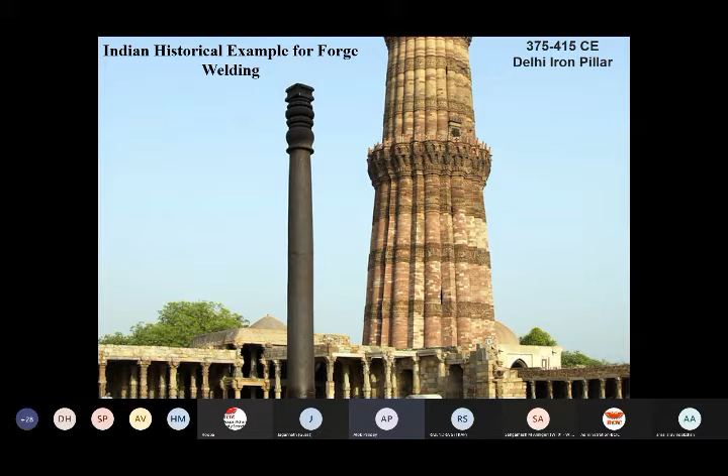Now basically when we talk about welding, welding is one part of joining technology. In the joining methods of welding, we have one which is fusion technology, where actually we are melting the base metal. So when we are working with base metal welding, that comes under the category of fusion technology. Fusion technology is popular in terms of arc welding, gas welding, and plasma welding - the normal popular weldings are arc welding in this particular robotic segment.

This is TIG, MIG, MAG, and CO2 welding, which is divided on the basis of gas and electrode. Second is pressure welding, where we are joining by pressure. This is an advanced version of forge welding, like the iron pillar kind of thing, where the complete component has to be forged and welded. But here, a particular point or area is forged at a particular temperature, and by applying pressure we are able to join the component. So this is an example with spot welding, friction welding, and gas pressure welding.

Then last is the brazing application, where actually we are not melting the base metal, and with that we join the component by the soldering and gas soldering method.

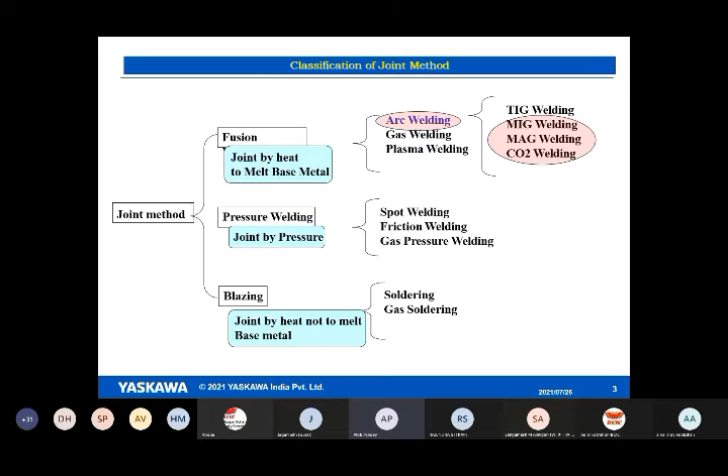When we talk about the basic principle of welding, welding is done with continuous current. We are just doing continuous current, and an arc is generated with the help of that. Whatever filler material and base metal is there gets melted, and we proceed with the welding.

In welding, mainly there are 4 things: wire feeder, torch, shielding gas, and power unit. The power unit normally requires us to give constant voltage and current. From the power unit, we give voltage and current for the wire feeder, so the wire goes through. Then the torch, which is normally positive in MIG welding, and we flow the material. And there's a shielding gas.

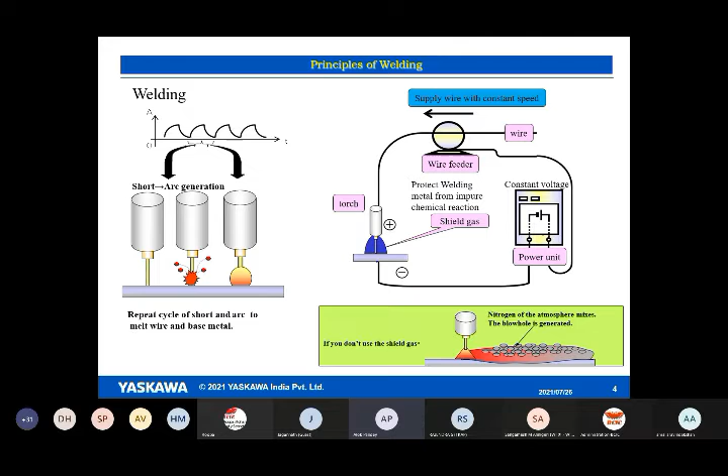Shielding gas is very important when we do any kind of MIG and MAG welding, because atmospheric contamination—nitrogen, oxygen, these kinds of gases—creates impurities during welding. The atmospheric nitrogen is the main root cause of generating blowholes when welding. So our shielding gas is very important, and that's why, based on the shielding gas, different kinds of welding are named.

Here we talk about the types of arc welding. As I told you, MIG, MAG and TIG are normally variants of arc welding. MAG and MIG welding work with a consumable electrode, melting our base metal. This is the most popular method, with 80 to 90% usage going to MIG and MAG welding, because now we normally go for high productivity, and wherever high productivity is concerned, we go with MIG and MAG welding.

The major advantage of MIG and MAG welding is high speed. The disadvantage is there will be some spatter and distortion, but with our advanced technology available at the current stage, we can remove the spatter completely, and distortion will also be controlled. So I would like to run a small video where a brief basic explanation is given about MIG welding.

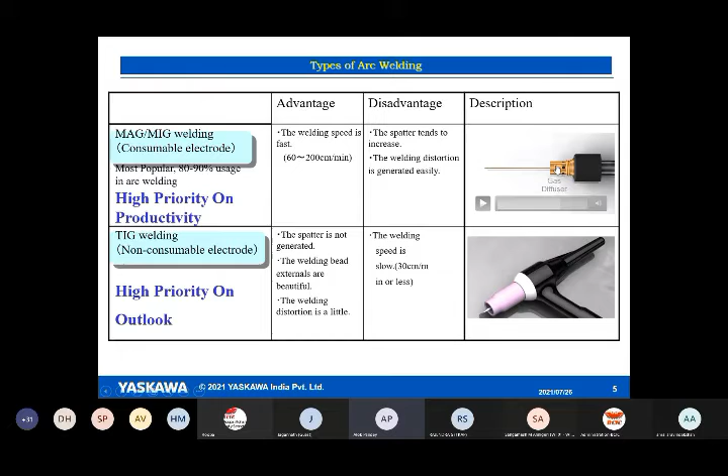Whatever shielding gas is there goes through this particular unit called the gas diffuser, and the gas diffuser works to diffuse the gas. So our welding gets protected from blowholes and other such issues.

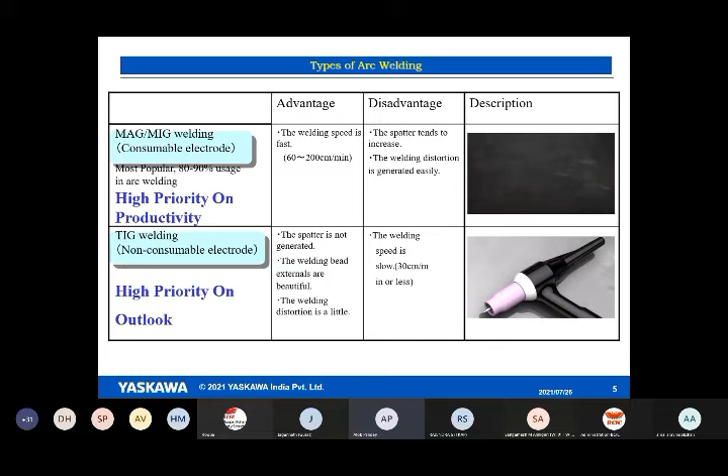Now we'll talk about TIG welding. TIG welding uses a non-consumable electrode, and we normally use TIG welding where we require a good outlook. The advantage of TIG welding is that spatter is not generated, the welding bead looks very beautiful, and distortion is very little. But of course, TIG welding works at a very slow speed.

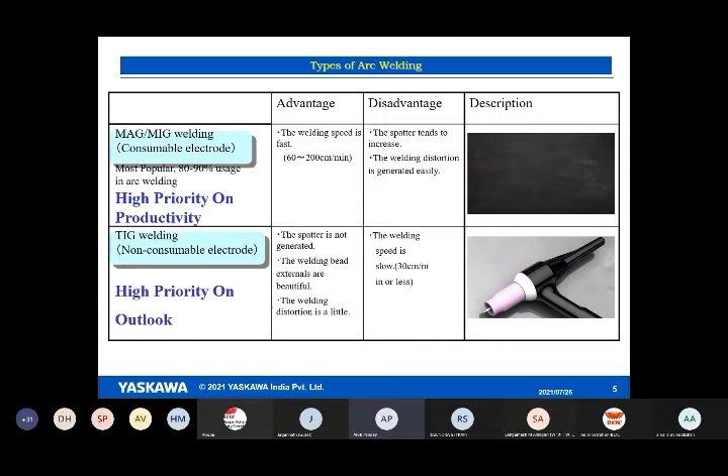When we talk about the welding technology here, we have a tungsten electrode, and tungsten has a very high melting point. So in this case, since tungsten has a very high melting point, it is normally considered a non-consumable electrode.

It means it's not really non-consumable—it also gets consumed, but it takes a very long time, because here only the base metal is getting melted. With the help of this electrode, we are able to melt the base metal and succeed in TIG welding. In MIG welding, whatever electrode is there gets melted, but in tungsten welding, it does not.

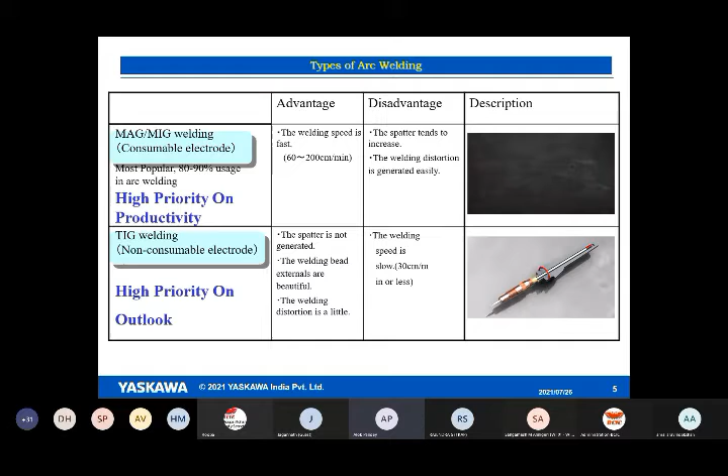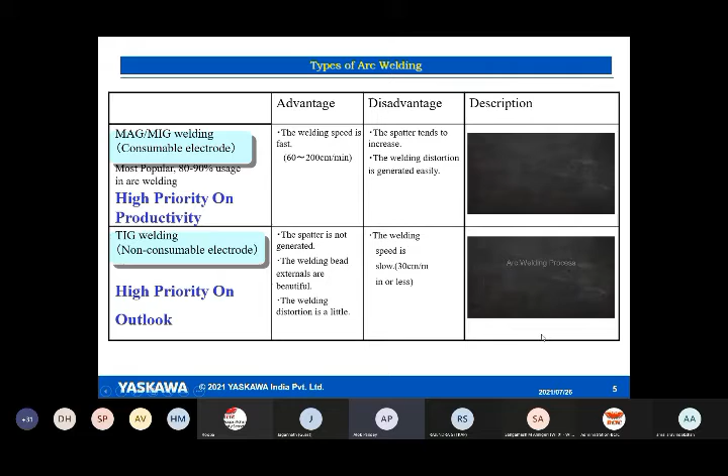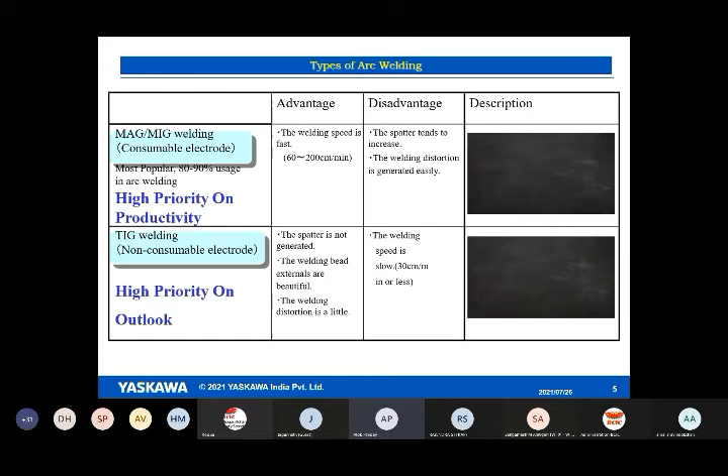So that we can adjust the electrode whenever we are doing the TIG welding, and it will be covered by the end cap. So this is TIG technology where, when we are feeding, it's just melting the base metal, and by melting the base metal we are able to weld the component. This is an arc welding process with a non-consumable electrode, filler metal added by hand or separately. Shielding gas is stored in the cylinder at high pressure. So this is a summary of MIG and MAG welding along with TIG welding.

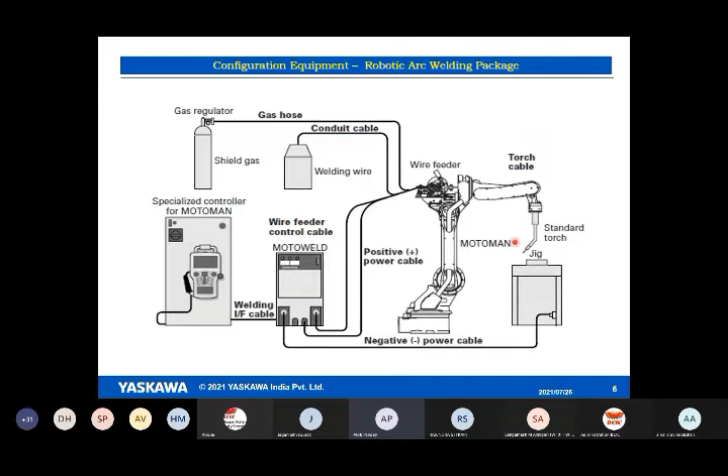And the gas hose goes from the gas cylinder. As we have already seen in the video, there are gas regulators from where we control the gas pressure. From the gas hose it goes to the wire feeder, and through the wire feeder it moves towards the torch, and comes out from the gas diffuser. So this is the basic combination for robotic welding, and this is a complete setup, a ready to weld package. So whenever you are discussing with any vendor, you have to take the complete package for normal robotic welding.

Then we talk about the classification of MIG and MAG welding. One is on the basis of waveform control: a pulse waveform and a short arc waveform. Second is on the basis of gas. The shielding gas, as I told, plays the major role. Argon gas is normally used in aluminum MIG welding. Argon 98% with O2 is mainly for SS welding, and MAG welding with argon and CO2 mix is popular for mild steel and SS. CO2 welding, which has the lowest gas price, is normally used for mild steel.

So normally, as this chart shows, the price is low when we go for CO2 welding, but spatter tends to increase. But we have a few latest technologies with which we can even control the spatter with CO2 welding, and we can go with high speed also, which I will explain in a later slide on the Eagle method.

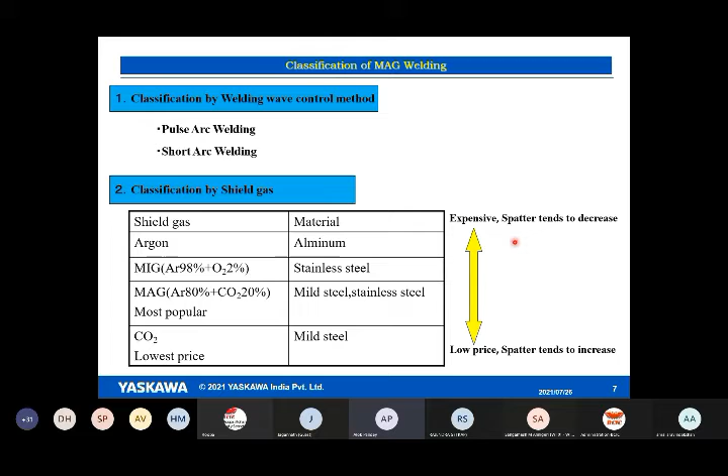So now, gas type welding. In gas type welding, as already explained, there is MIG, CO2 and MAG welding. Now I just want to touch on the good points of each gas. CO2 gas gives very good penetration because of a good amount of heat input. But of course, some spatter is generated. Then with argon gas, arc stability is excellent, and as a result the mechanical properties will be excellent.

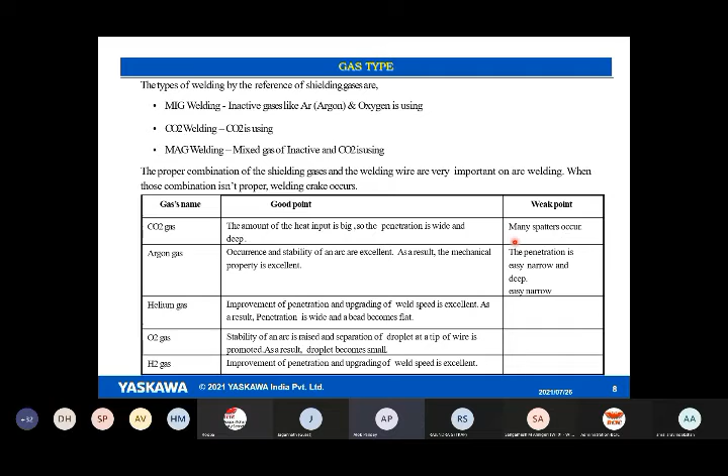With helium gas, the improvement of penetration and upgrading of weld speed is excellent. With oxygen gas, arc stability rises and separation of the droplet at the tip of the wire is promoted. As a result, the droplet becomes very small. And with H2 gas, improvement of penetration and upgrading of weld speed is excellent. As for weak points, with argon gas the penetration is shallow and narrow, so penetration will be less with argon gas.

Now we'll talk about the waveform basis. On a waveform basis, there is pulse welding and short circuit welding. I am just talking about this on a thumb rule basis. Pulse welding we normally use for more than 3 mm. Of course, pulse welding can be used with higher trends of technology with 1 mm also, but on a welding thumb rule basis, normally we use pulse welding for medium thickness.

The pulse welding advantage is that its speed is normally 80 centimeters to 200 centimeters, so we can go very fast, and the amount of spatter tends to decrease. As a disadvantage, burn through tends to be generated, and welding distortion tends to be generated.

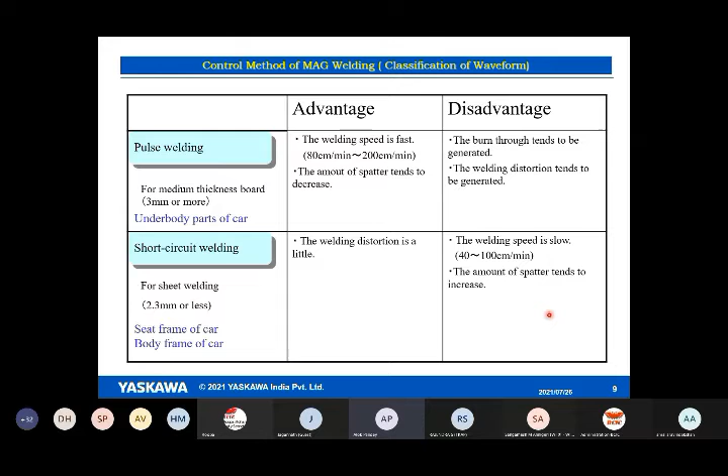Short circuit welding, as a thumb rule, is known for lesser sheet thickness, like 2.3 or below, and the welding distortion is very little. The welding speed is slower than pulse, and spatter tends to increase. But as I already told, the slow welding speed and increased spatter is an issue with short circuit welding, but when we go with advanced technology, this will not become an issue in short circuit welding.

So this is the waveform format. I just want to explain how the waveform normally works in pulse welding. In pulse welding, wherever we are holding the current, in this particular area we are melting the wire. This is the production of the droplet. Then after that we are transferring the metal droplet, and at the end we are again holding the current and maintaining the arc, and we repeat this cycle again and again for pulse welding.

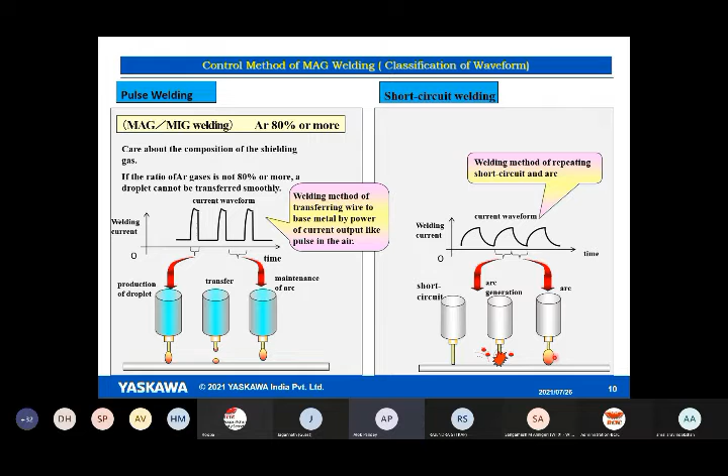In short circuit welding, our wire is touching the base metal, generating the short. When the short is generated, arc generation will happen, and with this continuous cycle we are maintaining the arc and continuously doing the welding.

This selection of welding is a summary of whatever we have talked about short circuit welding and pulse welding. Short circuit welding is basically for the base part category: seat frame, body and frame. The sheet metal thickness is 2.3 or less, and pulse is 3 or more. Welding speed is 40 to 100 centimeters, and pulse is 80 to 150 centimeters.

Penetration in short circuit will be high, in pulse relatively low. Bead appearance in short circuit will be higher spatter, less burn through, and in pulse, low spatter, more burn through.

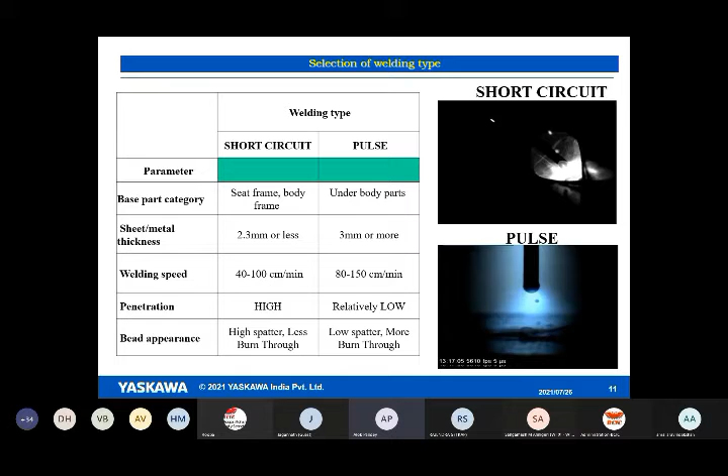These examples are there. On the right hand side, both videos are shown. In short circuit welding, the wire is continuously feeding, touching the base metal, generating the short again and again and melting the wire. On that basis, welding is going on. And in our pulse welding, when we are holding the current, we are melting the wire and the droplet is going down, and with this continuously we are melting the wire and performing the pulse welding.

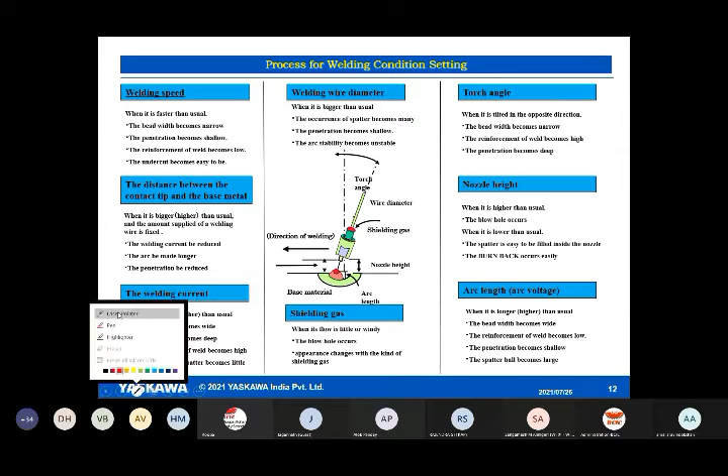When the distance between the contact tip and the base metal is higher, which we normally call stick out, the welding current is reduced, the arc will be made longer, and penetration will be reduced.

When the welding current is bigger than usual, meaning more than the welding current you have to provide, the bead width will become wide, penetration will become deep, reinforcement of the weld becomes high, and the occurrence of spatter becomes little.

Then of course, in welding we have different wire diameters. Whenever we increase the wire diameter, spatter occurs more, the penetration becomes shallow, and the arc becomes unstable. The next is the shielding gas. Whenever your shielding gas is low or it is windy, you tend to get blowholes in your welding bead. The appearance changes with the kind of shielding gas we are using.

Then torch angle. If we go in the opposite direction from the predefined torch angle, the bead width will automatically become narrow, the reinforcement of the weld becomes high, and the penetration becomes deep. When we talk about the nozzle height, as shown in this diagram, the tip and wire stick-out together is the nozzle height.

Whenever we increase the nozzle height, blowholes occur, and when it is lower than the usual height, spatter easily gets filled inside the nozzle and burn back in the nozzle will happen. So we have to be specific about our nozzle height. Then arc length and arc voltage. When it is longer than usual, the bead width becomes wide, the reinforcement of the weld becomes low, and penetration becomes shallow. But the spatter ball becomes very large whenever we go with a longer arc voltage.

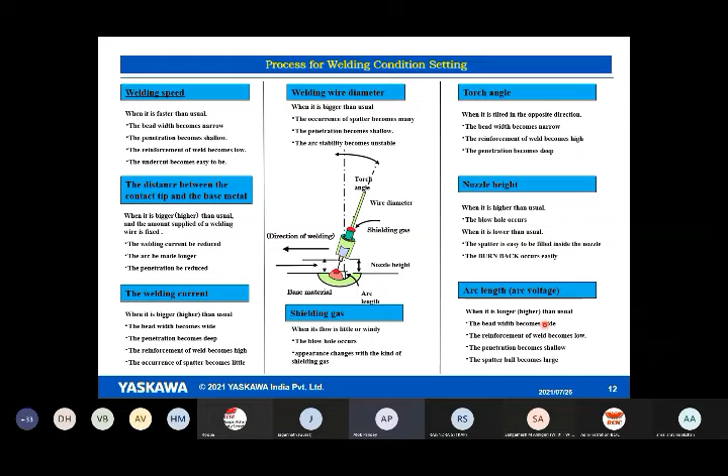So this is a summary of the weld conditions. This is of course the basis of a basic thumb rule only; with different technology, things always change. Other than this, I want to talk about a few pre-process examples. When we are doing heavy welding, some kind of crack occurs. So how can we reduce that crack?

For reducing that crack, we have to go for the pre-process, and that pre-process is preheating of the base material. Preheating the base material to be welded minimizes the temperature difference between the material and the arc, slows the cooling rate in the weld area, and reduces the risk of cracking.

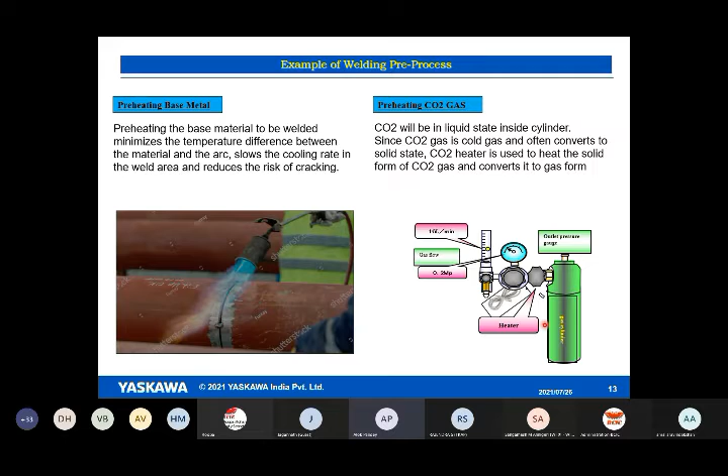Also, preheating of gas is required whenever we use CO2 gas. CO2 gas has a tendency, when the temperature is very low, to get into a somewhat liquid or solidified stage. So in that case we have to use a heater. If we heat the gas, then when we are welding, our weld width comes out proper. So in case of CO2 welding, we have to use the heater on the backside for good welding.

Other than welding and the welding power source, let's talk about robots, because these power sources have to be mounted on the robot. In the industrial category, robot suppliers have different reaches and payloads based on customer requirements. A 700 mm or 900 mm reach robot is very compact, specific to applications where the customer is very choosy about space consumption. If you want to work in minimum space, then normally we go with a smaller reach robot.

But in automotive, the popular range of robots is the 1440 mm reach and 2 meter reach robot. These two robots are very popular in the automotive industry, and with them we can solve all kinds of components. Then there is one more, a 7 axis robot, where the elbow arm has one more axis. If you are making a very compact cell and want extra accessibility through the robot, normally we go with this 7 axis robot.

When a 3 meter reach robot is required, this is normally for the engineering or non-automotive industry, where your reach is very wide and you require a longer reach robot. Production is not that much, so in that case we go with a longer reach robot, where a single robot, single machine can perform the work and you can achieve the complete component.

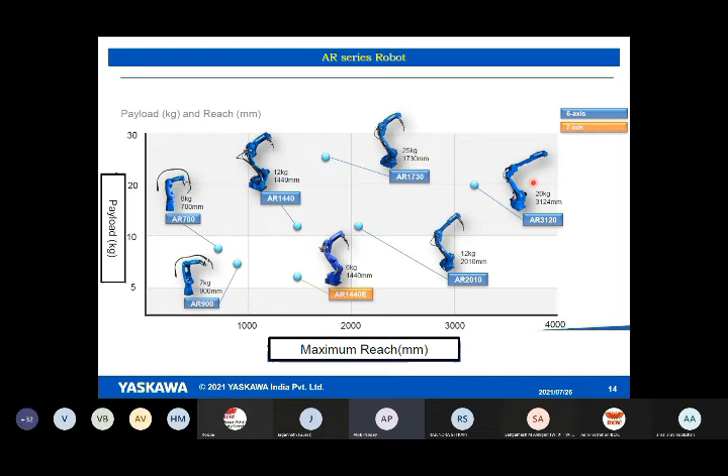Then this different kind of power source. So on the basis of function and on the basis of thickness we have to choose the power source. When we talk about the 350 amps category power source, as a thumb rule they are normally suitable from 0.6 mm to 4 mm thickness of welding, where their performance is very good.

And when we talk about the function, like basic short circuit welding power source like SR350 and all that we have. So with the basic function we can move further on that. And when the function needs to be increased, like low spatter with CO2 welding and pulse welding, in that particular case this X350 power source is there. So whenever we are enhancing the pulse technology, going for low spatter, we are increasing the function.

And further, with 100% CO2, as I told in the earlier slide, CO2 has a tendency to generate more spatter and speed is slow. But when we go with this kind of system like Eagle, this is a servo wire feeding system where the torch is servo. From the actual servo motor you are taking the wire, pushing it, and controlling it by a push-pull mechanism. This will reduce your spatter by 97% and increase your speed by 40 to 50%. So this is an example where from short circuit welding also you can get very good speed and very good bead quality.

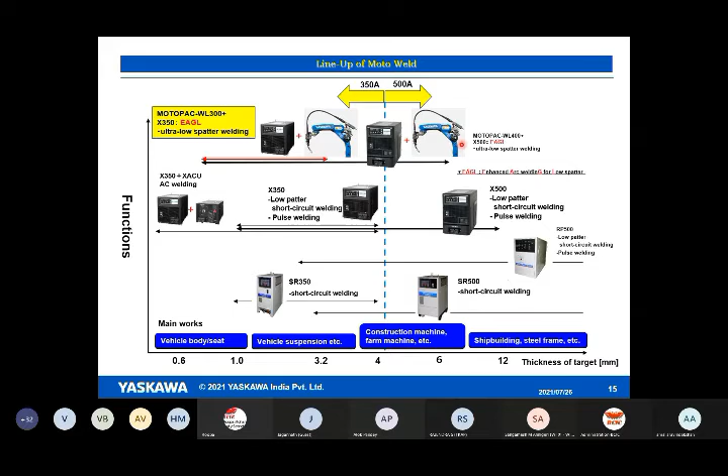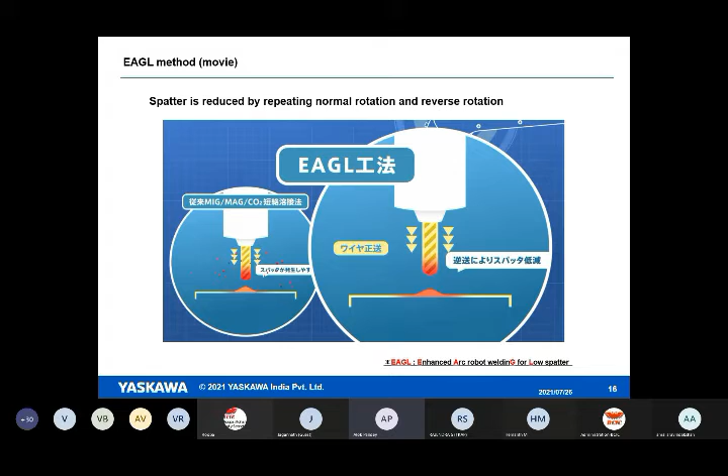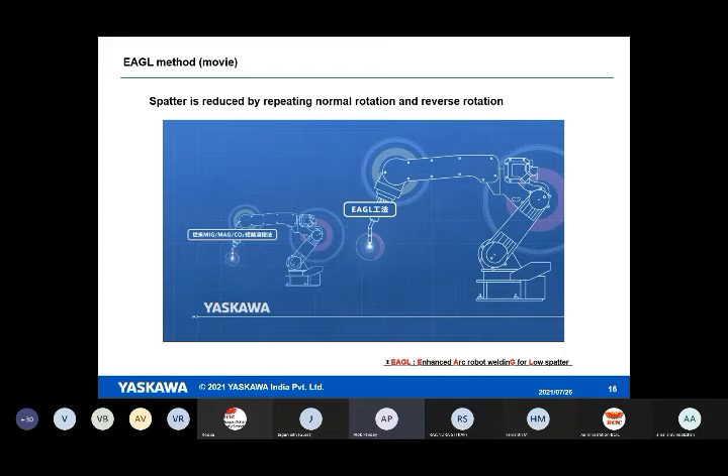So here I just want to explain how with Eagle welding, or with a servo wire feeding system, we can achieve low spatter with short circuit welding only. If you see in this video, when normal arc welding is happening in short circuit, the wire is moving continuously in the forward direction, and when it touches the base metal, the back force is generated and spatter generation happens. But with the push and pull system, we are continuously feeding the wire and then going back whenever the back force comes. So spatter generation will be very little. And second, as it has a servo wire feeder, we can push the wire at a higher speed and achieve greater speed from the same welding machine.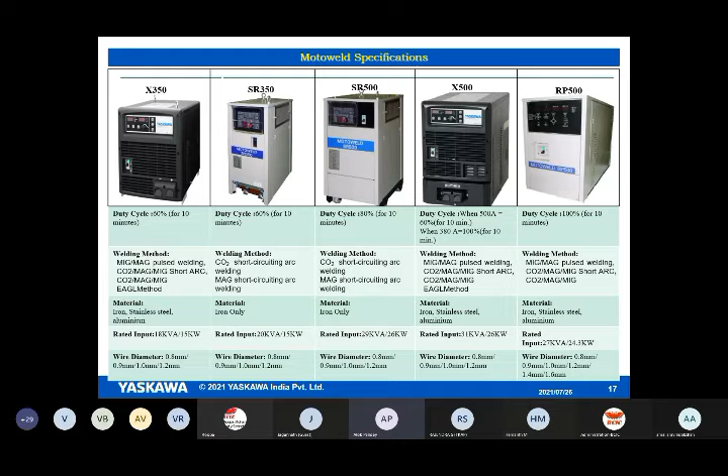So these are different kinds of power sources, we have X350, SR350, and this is catalog data. So I don't want to go further with this data. I will skip this slide.

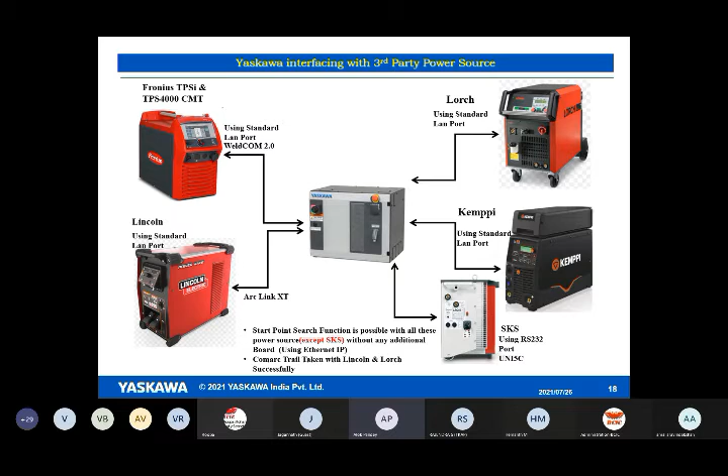Other than this, the robot suppliers have their own inbuilt power source. So normally we suggest that wherever the customer is a first time user, they should go with a pre-built single source solution, robot and power source. But on the basis of technology demand, if the customer is going for very thin sheet welding, then TPS 4000 CMT, a CMT power source, is required. In that case you can use Fronius, and Lorch, Lincoln and Kemppi also have special technology for special dedicated components. So you can use all these kinds of power sources, select them with our robot, and weld the component as per your requirement.

Then when we talk about the robot power source, if we see in the market, as Jagannathan sir told, there is still a possibility that we are not getting the actual component, because our pre-process, our cutting process, or our stamping process is not correct. Because of that some deformations are there, so we are not getting the actual part position.

So in this case, we have different kinds of technologies available in the market for seam finding and seam tracking. By calculating only the first and last point of your component, you can find the bead and weld. In that case you will be going for seam finding. You search the first point and last point, make the program, and it will be welded automatically. For seam finding, different techniques are there, like touch sensing, AccuFast, MotoSight 2D, and Servo-Robot SF-D/H.

When we talk about touch sensing, it is actually through wire sensing. With the filler wire we go and touch the component on both sides, and after touching the component we find out what the center of that component is, and then we start welding.

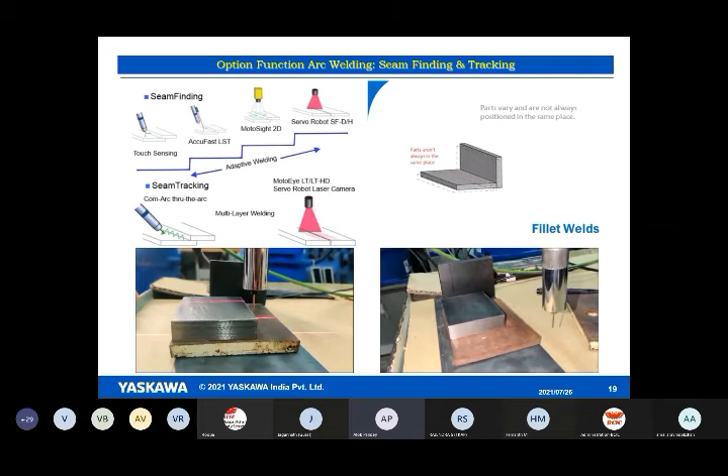With laser cameras and laser sensors, two examples are shown below, where in all three directions, X, Y and Z, we can find the part deviations and weld through the arc. In the first video, we have tilted the component, and even after tilting it, when the torch starts welding, it follows the component.

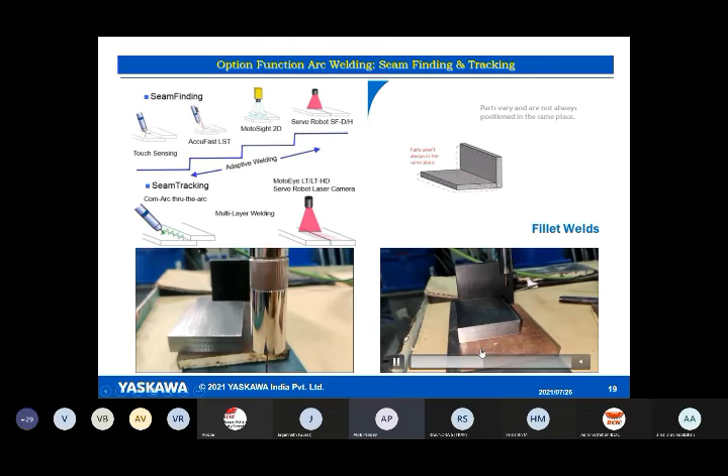In the second video, the component is placed on one level, and now we are increasing the height. After increasing the height, when the robot starts, it follows the path, changing the height. So with the laser sensor the searching time is very short, and with that short searching time we can find the part and bead and weld the component through arc welding.

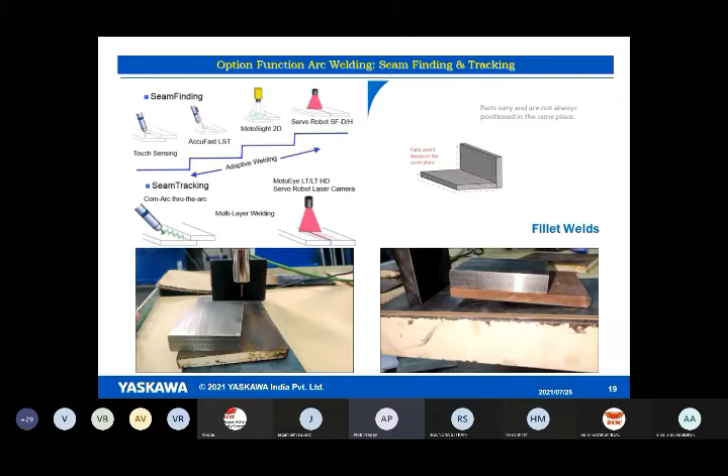Now we'll talk about robotic jigs and fixtures. A complete robotic welding cell consists of the robot, welding power source, safety enclosures and welding fixture. The welding fixture also plays an important role in robotic welding. Whenever we are welding, we have to make sure the torch is accessible at all points with the predefined angle required for welding, and proper clamping should be there.

In this picture, what we want to show is that we have given clear space, because here we are using the laser sensing method. First the robot searches and then it welds, so it requires clear space as well.

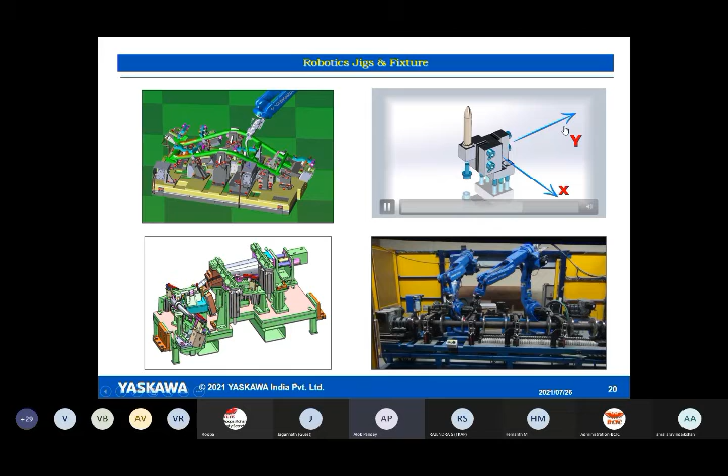This is an example of a locating pin. This is a mounting, and here we have a block. In X and Y direction, we should have variation and adaptability to change the fixture. So this is an adjustable 5mm shim and 5mm block. Here also 5mm shim and 5mm block as a rule of thumb we have to see, and this kind of X and Y tolerance we have to keep for modification.

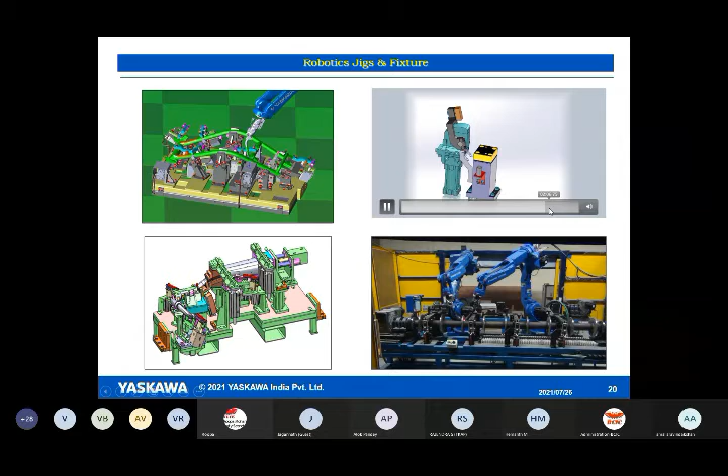Also, when we talk about the support tower with tower clamp, in this particular case also we have to place it in Z direction. In Z direction, 5mm plate and 5mm shim should be there, so we can adjust in Z direction.

Also in robotic welding, we should always have a part presence sensor, because if the operator has not loaded the part, that has to be taken care of.

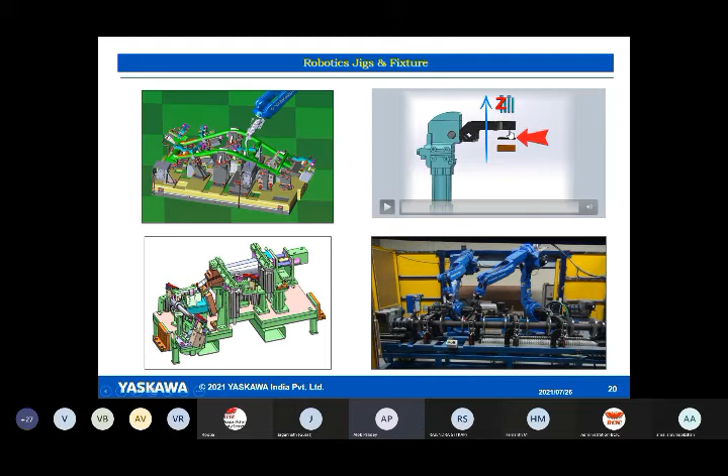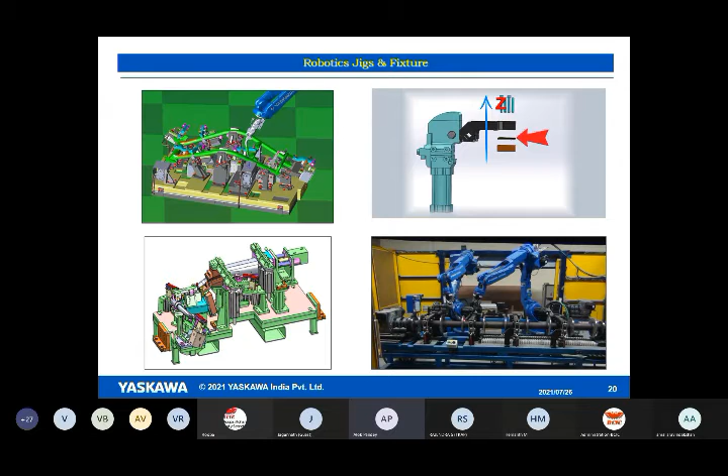And this is just one application video which I would like to run through.

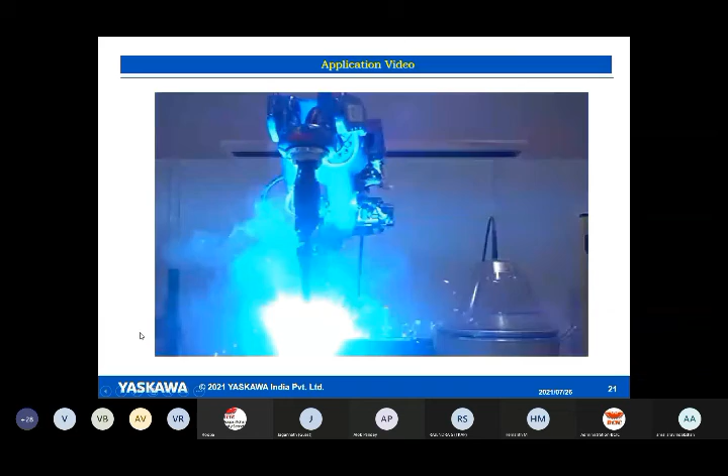If you listen to the sound, normally whenever we are doing welding, the sound actually gives a perfect feel for what kind of welding you are doing. If your sound is good, then your welding is also good.

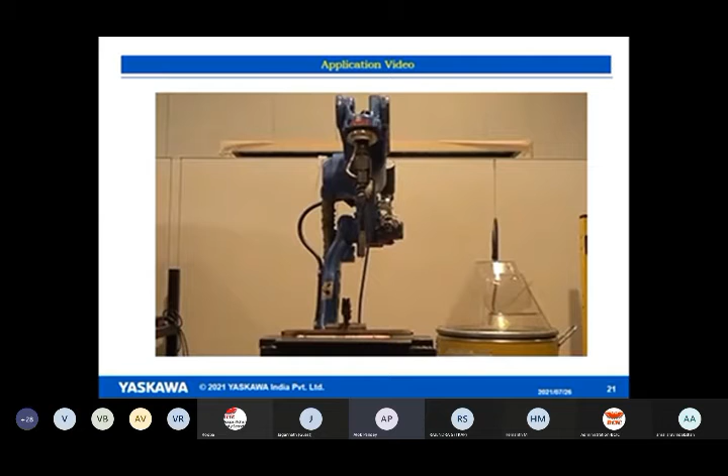As Jagannathan sir told, we will move further for the ROI calculation. Whenever we go for ROI calculation, before that we have to make the estimation sheet, like how many parts we can produce. And when deciding how many parts we can produce, there are basic parameters for that.

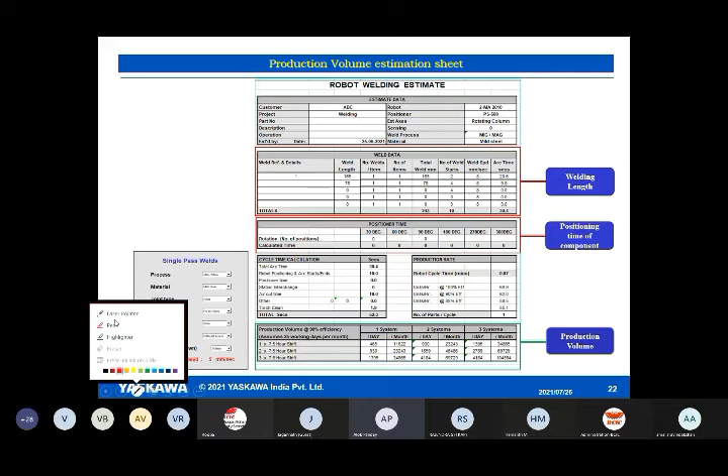The basic parameters we have to select: whether it's single pass welding or multi pass welding, which process we are using - MIG, MAG, TIG - what kind of material, what kind of joint, what position - horizontal, vertical - what is the bead size, and what is the speed factor, meaning whether it's difficult to access or easy to access, linear welding.

When we enter all these details, only after that can we understand what the welding speed will be. So on the basis of filling in this detail, we can understand the welding speed. This data is required for calculating the basic welding speed with wire size.

Once we get the welding speed, then we select whether we are using a robot. And if we are using a robot, after that, if we are using any positioner, whenever you are tilting the component, that also takes some cycle time. So the positioning time has to be calculated whenever you are going for positioning the things, or any external axis by rotating column and such, that is going to increase cycle time.

Or the sensing technique - whenever you are using any kind of sensing technique, it's going to impact your welding time. Whatever your welding process time or welding cycle time is, welding speed is there, that is going to differ, normally for through-arc welding.

So all these things we have to enter and put the data, and after that only, each bead or length we have to enter, number of items we have to calculate - how many number of items. On the basis of number of items and such, we can calculate how many number of starts and stops are there, because each welding, whenever arc start and arc stop is happening, depending upon the power source, it takes 0.4 to 0.7 second for arc start and arc stop. So how many arc starts and stops there are, that has to be added.

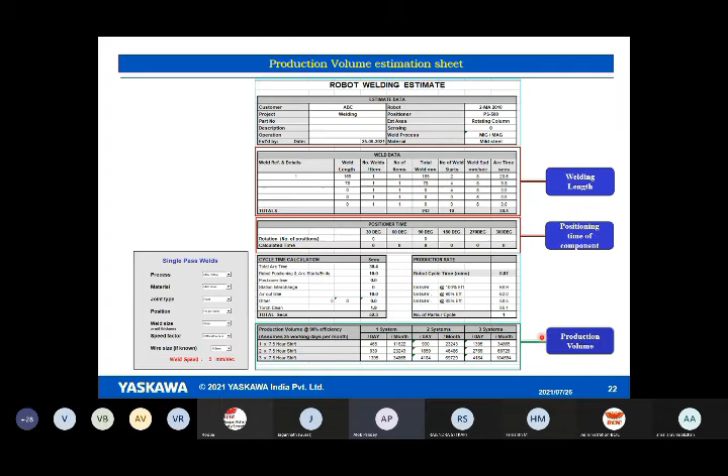And when we talk about the ROI sheet, different people, different customers, and different kinds of vendors tend to have different kinds of approaches.

But when we talk about one component, I have taken the example of fork and frame with a thumb rule, where we are using only one robot for welding 3.2 meters. This is a very rough example. So if 3.2 meters complete length is there with this wire weight, and the approximate rate I have taken is like 90 rupees per kg, something like this.

In this particular case, when we are going with manual welding, calculating weld cost, gas cost, power cost and labor cost, including all that, it comes approximately 56.48 rupees, or around 56 rupees cost for 3.2 meter welding.

When we talk about robotic welding, approximately 10% saving will be there for the welding wire. How does this wire saving happen? One thing is, whenever a manual labor is welding, he tends to make a bigger bead, so that's one saving.

Second saving is that whenever we go for robotic welding with the same parameters, we have good spatter control. And whenever spatter generation happens, spatter is actually a loss of wire. Less spatter means you are utilizing more wire efficiently; more spatter means you are wasting more wire. So the wire consumption with spatter, and whatever excess material we are not feeding, we are covering that.

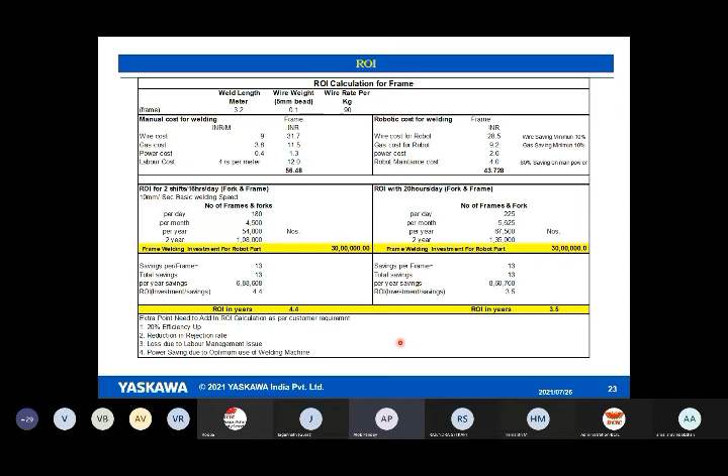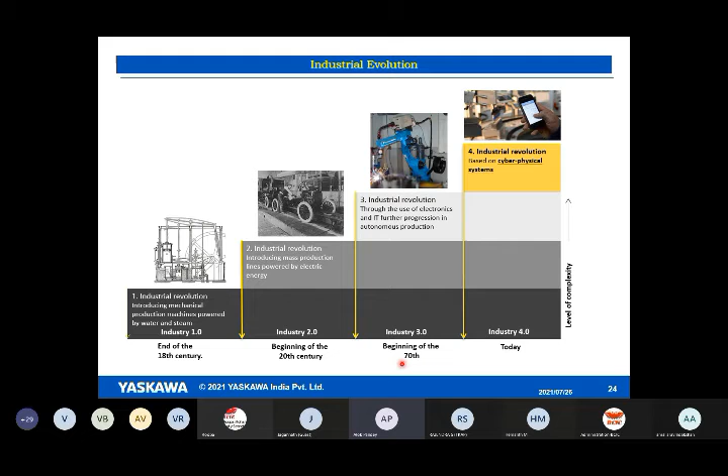It's not only taking the data and analyzing the data, it's not digitization, because digitization we have already completed in Industry 3.0. Now it's time for the cyber physical system, where whatever digitization we have done, like whatever sensor, whatever feedback is coming, we are taking the feedback, taking the current, taking the voltage, recording it. These things we have already done. Now this data we take, we analyze it, and after that we correct it. This is Industry 4.0, and we are connecting all parameters together.

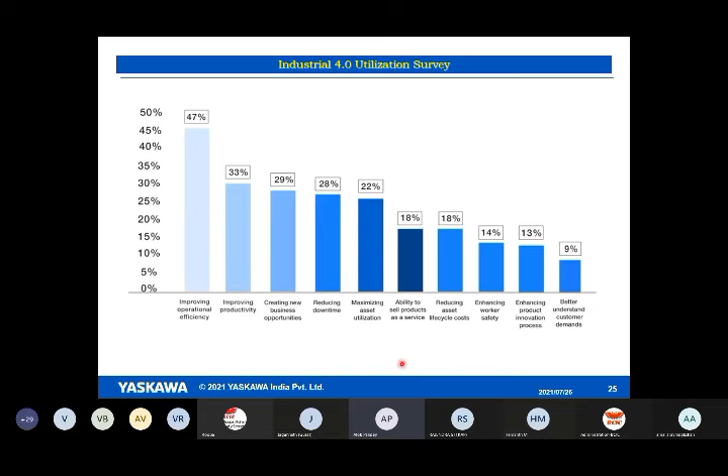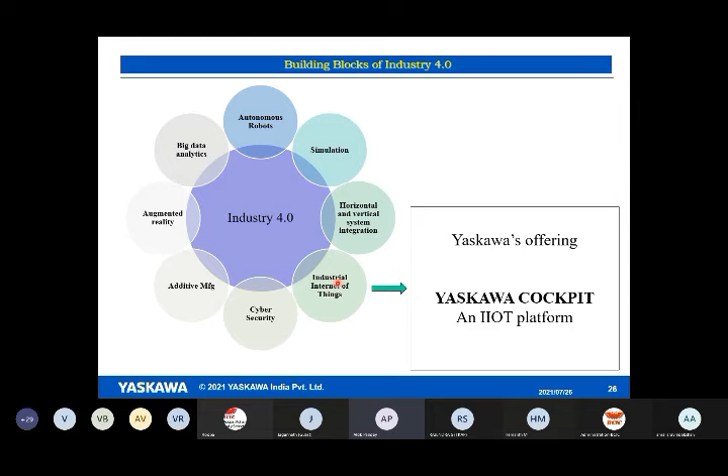So the Yaskawa cockpit, when we talk about it, is an AI technology based system which will identify the cause and issue that are arising, analyzing the defect in each process, from operation data at the manufacturing site, to make it possible and provide feedback.

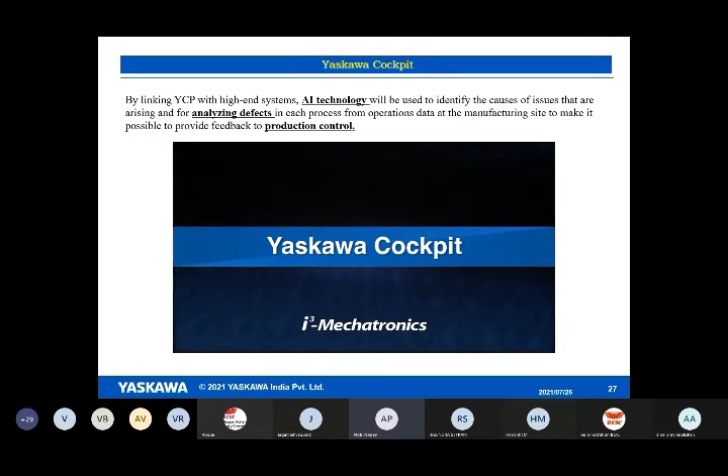So the Yaskawa cockpit, which is actually i³-Mechatronics based, here we visualize operation and system data, with all kinds of data visualization available to us.

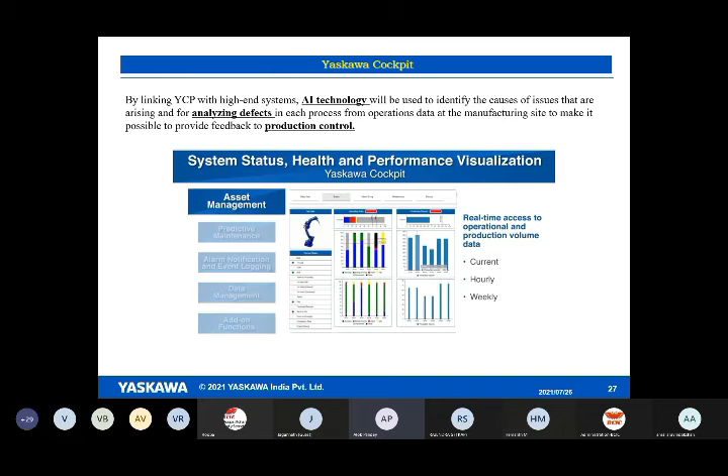So we can do asset management, like what kind of assets are there, how they are getting utilized, event maintenance. This asset management lets you see how much time is running, the activity, how much time the robot is off, how much time it is running, predictive maintenance, anything on the power side, the power data.

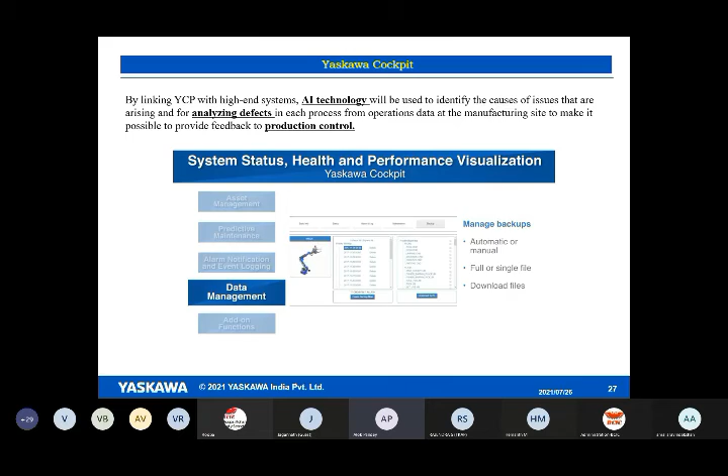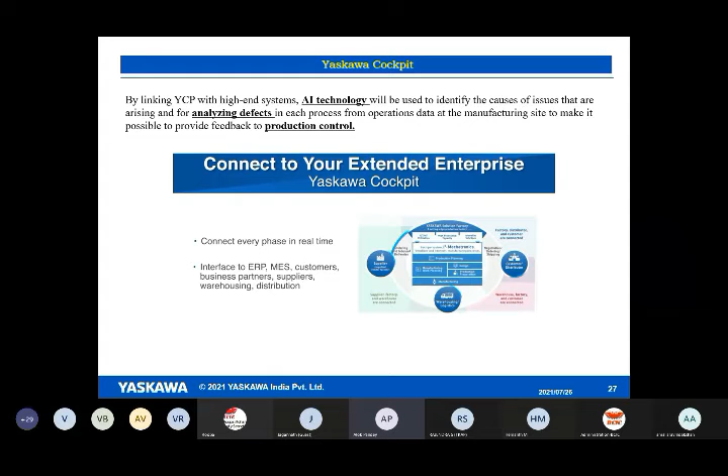Like what kind of support we have to do, what kind of maintenance, all kinds of alarms getting stored, and what kind of data is there on the robot, you can access and take. This data you can link with add-on applications, visualize it, develop your own application, and see how you can use it. This data can also be linked to ERP, MES, for your easy understanding and creating your business needs.

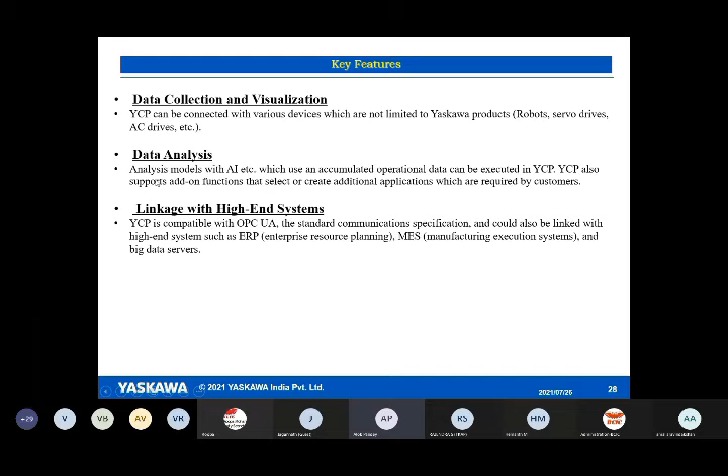So basically the outcome of that video, like data collection and visualization, then you can do the data analysis and link with the higher end system with the help of OPC UA. So now we'll talk about how the system gets linked with OPC UA.

So normally what all product companies are doing, whatever the system is there, they are making one core system. So we are having the Yaskawa Cockpit core system. Whatever device is connected, from DC or DA app, the data will be stored in the YCP system. And this data will be analyzed on this basis, and through Web API, we are able to access that particular data and analyze it.

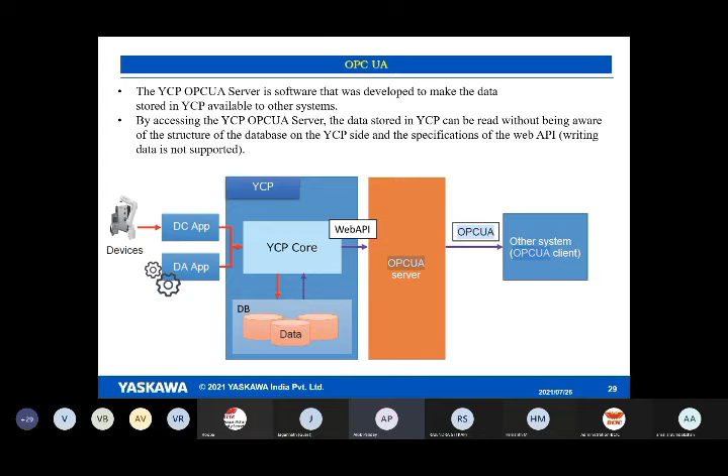And then through this Web API, we can give this data to the OPC UA server, and the OPC UA server is a common platform where you can utilize this particular data and make your own system on the basis of your factory requirement or factory understanding. You can utilize this data. This is actually our current YCP structure.

Also, we can generate emailing and web server functions, where if any alarm is coming from this data, you will get the information on your server or through mail. And whatever data is there on Yaskawa Cockpit, you can take onto the OPC UA server, an open platform, and use it with your OPC UA client, where you can customize the complete system on the basis of your ERP needs.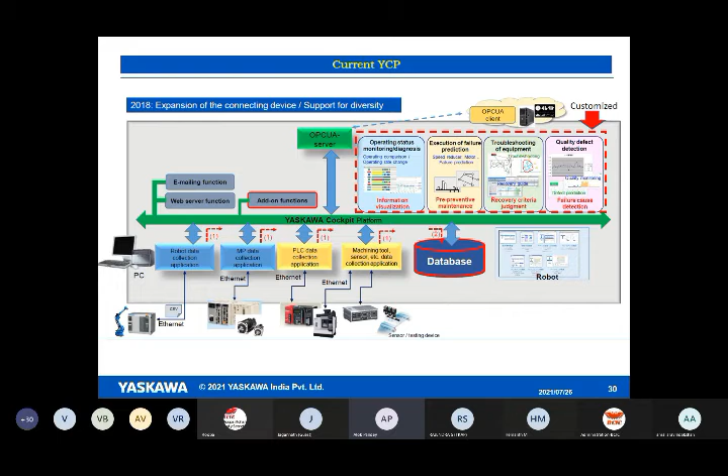Oh, I think I've gone very fast and the session is completed. So Jagannathan, now it's over to you. Yeah.

Thank you very much, Alok, for an enlightening session on various aspects, especially the seam tracking intelligence, the robot with various technologies, from touch sensing to laser to vision. And of course, spatter control with pulse and short circuit welding. Very interestingly, I found return on investment to be less than 3 years. And looking at the rejection efficiency overall, it's definitely going to be a big benefit in terms of robotizing welding in the near future.

And coming to Industry 4.0, especially Weld 4.0, the OPC UA handshake in terms of all the data available as OPC UA server and client methodology is really very, very interesting. So it has been a good session, and now we open the session for questions and answers.